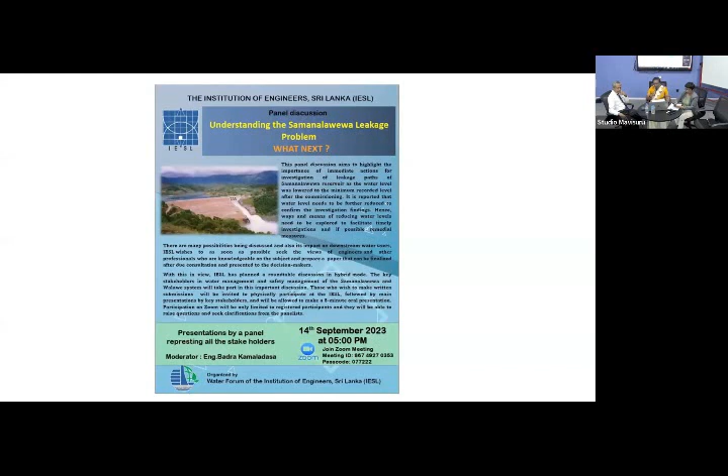With that small introduction, I will show you the agenda today. We, Water Forum and IESL, invited a few relevant stakeholders for this discussion. We call it a roundtable discussion, even though there's no roundtable here. Anyway, there's a small roundtable. Most of the resource persons are there in the audience.

The first speaker will be Dr. Kamal Laksiri. He will speak, as Kamaladasa mentioned, about the history of the leakage, and that is the area we have given him, we expected him to cover. And then Dr. Jagat Gunatilaka. I will introduce each and everyone separately.

Then we invited Ceylon Electricity Board, Mahaweli Authority, Irrigation Department, National Water Supply and Drainage Board, Disaster Management Center, and Sri Lanka Energy's mini hydro company, Mulgama Mini Hydro Power Project, and also Engineer Arupala and Dr. Tilakshmi Balapitiya, so we have to address the issues elaborated by Engineer Kamala Gunawardana.

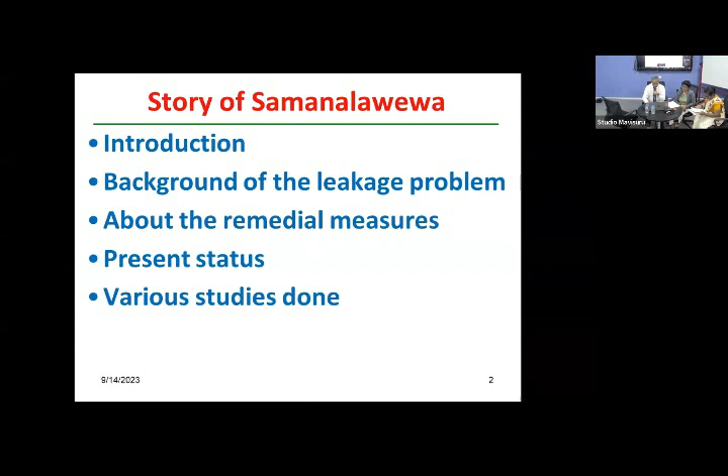This is the presentation set up today, about the Samanalawewa project. I think you all know it as one of the major power projects in the country. It's on the Walawe River, mainly for power generation, but we have a small irrigation component that feeds the Kaltota irrigation scheme.

This was made during Minister B.S. Ranaka's time. This project, like all the other projects in the country, was studied since the 1960s by the Russians, Australians, Americans, and also our local Irrigation Department. Many studies were done, but as usual, because of funding issues, we could not implement the project until the 80s. So in 1986, during President J.R. Jayewardene's government, we could secure funds from UK, US, and Japan.

The major component of funding came from Japan, and we could implement the project. The project executing agency was the Ceylon Electricity Board. We had international consultants from Japan, and Electrowatt from Switzerland, along with the local partner CECB and the foreign consultants. We also had a separate design engineer from UK, the leading company at that time, Alexander Gibb and Partners. The construction contract for the project was a joint venture by Hazama, Kumagai, and other firms, all from Japan.

So this is the Samanalawewa layout. The Russians actually gave the name Butterfly Lake, so the Russian name comes from looking at the reservoir shape, which resembles a butterfly. And we have the Walawe River.

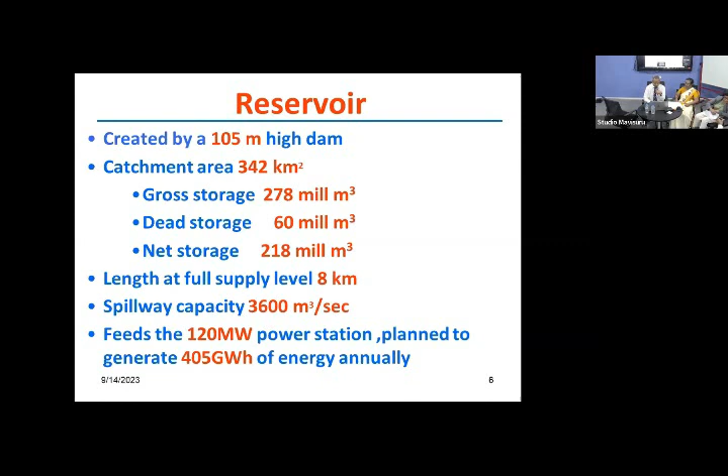Let me come to the geological aspects. I think we have geological experts here, Dr. Gunadasa, but I will briefly mention: the rocks belong to the Precambrian metamorphic rocks, very old rock types found on earth.

Especially if you look at this, the right bank geology was very complex, subjected to faulting - natural cracks in the ground - and folding, a bending kind of thing. This changes the characteristics of the ground. Especially at this site, we found surface caves. I will show you some photographs, and the permeability is very high even at the deeper levels. This is also a special feature.

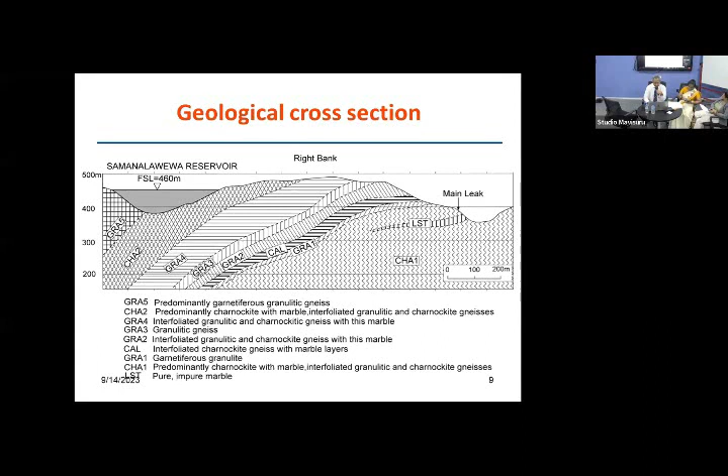But when you come to the dam foundation and left bank, the geology was totally different. I'll explain with the diagram. This is a cross section across the dam, across the river, along the dam axis.

When you come to the right bank, you can see the geology was very weak, and we had to drive 4 tunnels. You can see adit number 1, A at top, B, C, D - we had to drive 4 adits into the mountain, routed up and down. This shows the weak geological conditions in the right bank.

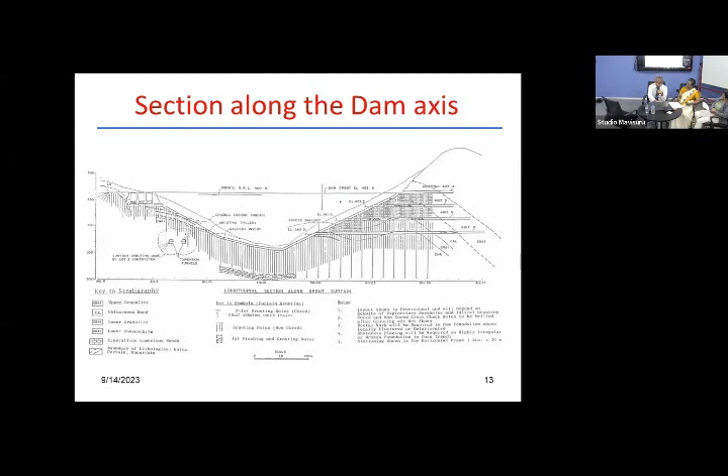So then you can see the difference between the right bank and the left bank and the foundation. The geology is very different. Then we discuss about the leakage problem. Then we started the dam foundation excavation, right abutment excavation.

We found the weathering, that is the weak rock, is spreading much more than we thought. This was found during the investigation. And also this abnormal groundwater level. Abnormal means the groundwater level is responding to the river, indicating that there are connections with the river.

So there were various opinions, Japanese, British, and the local. At that time, our giants like Singha, also KKYW, all were there in the decision-making process. Different arguments. Then everyone finally agreed, okay, let's go for a trial impound. The simple thing that we would do is fill it and see whether it leaks.

The Japanese were confident, they said no, it will not leak. The British were of the opposite opinion. Finally, we decided for a trial impounding. In June 1991, we started to fill the reservoir while the other works are going on. But unfortunately, we could not fill the reservoir just when it reached 16 meters water depth, the soil started to leak. It was obvious that it is going to leak. So this was the first evidence. Then we had to stop the impounding, the reservoir filling, and we planned for the remedial measures.

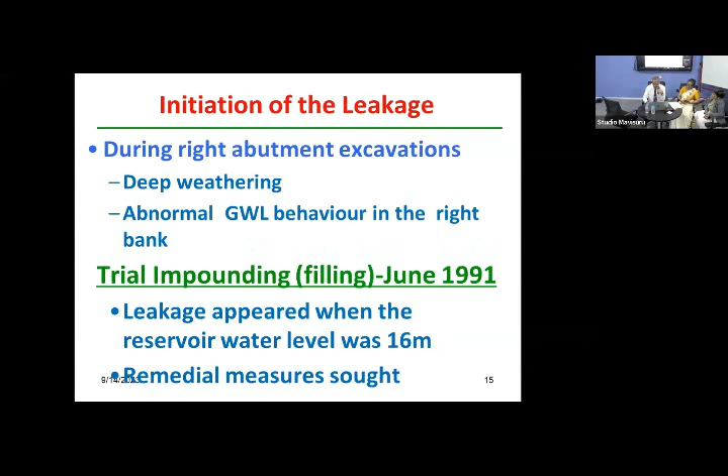Then the consultants, everyone discussed about the issue. Now it's very sure, it's going to leak. So how are we going to tackle it? Then came the first solution, the first remedial measure: to construct a grout curtain across the right bank and cut off the leakage path. I will explain this in the next diagram.

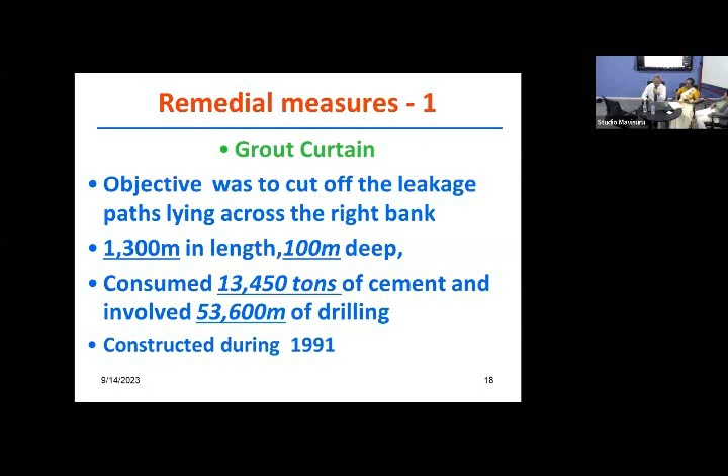So we constructed one of the largest grout curtains in this country, I think 1.3 kilometers in length. It's 100 meters deep, and it consumed 13,450 tons of cement, equivalent to the cement we use for this Rantembe Dam. It involved 54 kilometers of drilling to grout. It started during 1991.

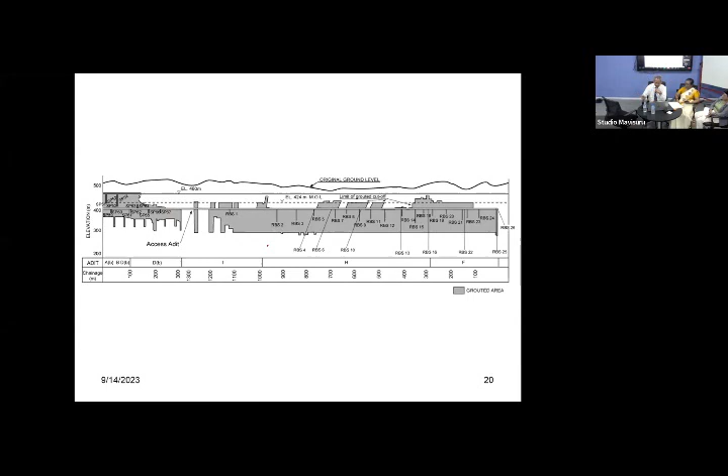But again, at that time the consultants decided, okay, 100 meters is sufficient, and that is how the depth of the grout curtain was decided. Then we did it, completed. And again, the plan view, if I show you, you can see this shape of the grout curtain.

We did it like this, but there were a few other faults, so to cut them and cover them also, we had to take a shape like this. And you can see these tiny numbers.

Actually, with the construction of the grout curtain, we installed piezometers, or the pressure gauges. We wanted to monitor the effectiveness of the curtain upstream and downstream. So we installed a number of them, you can see, SP1, S1, like that, DW, both upstream and downstream. Theoretically, if the curtain is effective, you should not get a pressure downstream, right? That's very clear, I think, to all of you.

And then we completed the grouting and spent 2 billion rupees on that. Same contract, and the Japanese funding agency OECF, that is now JICA - those days OECF - they funded and extended the loan, and we got the money and completed it.

And on 5th March 1992, Honorable Chandra Bandara, then Power and Energy Minister, came and started the official impounding of the reservoir. But unfortunately, the leakage continued to grow amidst the presence of the grout curtain.

So we did not care about the massive grout curtain we built inside the mountain. We observed as before, no change at all. And at the same time, the groundwater level in the mountain also started to rise with the reservoir.

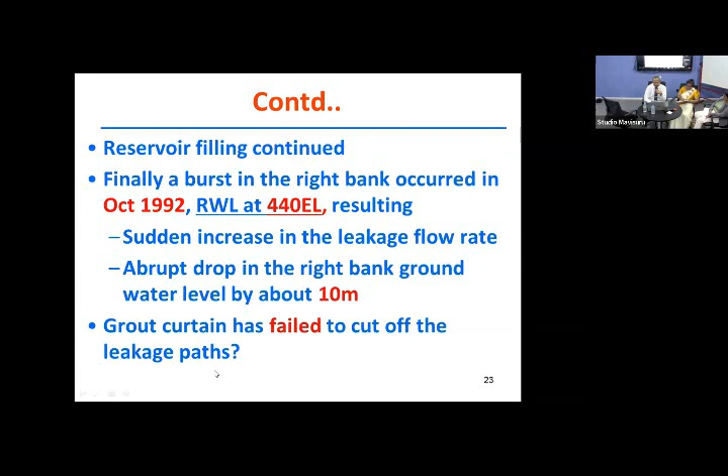Then with that, the leakage flow increased suddenly. I will show you some photographs. And with that, the pressure released in the right bank, so the pressure dropped by 10 meters. So that indicated the grout curtain failed against the leakage.

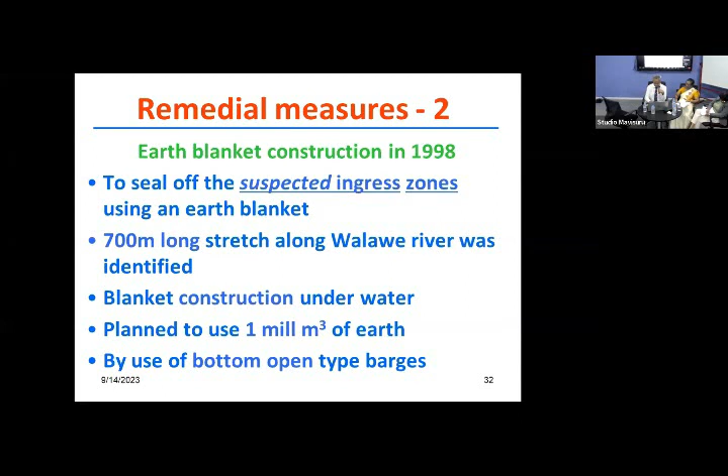I will explain further like this. Earlier we tried to cut these faults within the mountain itself. Now the study established that these 3 faults cross the riverbed within this stretch, so we suspected the water was entering from the riverbed, not through the slope. So let's seal this with the earth blanket. That was the idea of the wet blanketing.

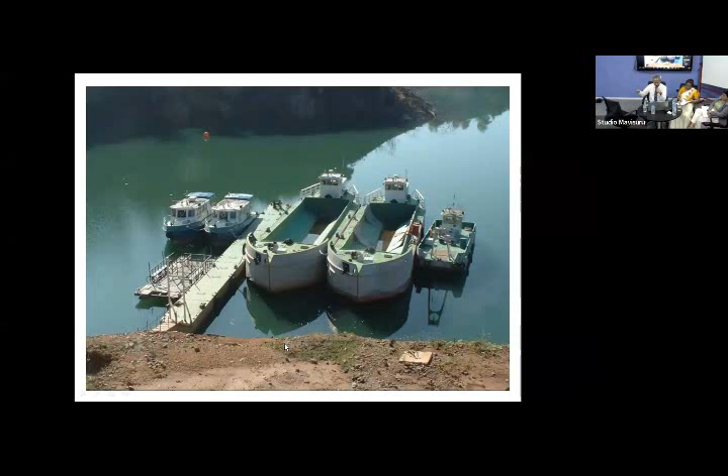So again, another diagram. These are the specially built barges, 2 bottom-open type barges, each with 125 cubic meter capacity. You can load earth into this, move to the location, and open the bottom so it goes down as a lump. We controlled the moisture content and did some piles, so as a lump it would go and hit the bottom and block the leakage ingress point.

That was the idea, but yes, we started and completed it. We dumped along the whole 700-meter area, but again there was no response at all. So we were wrong for the second time. Nothing happened - all 700 meters covered, no response from the leakage or the groundwater pressure. In the consultants, we all discussed that.

We thought, okay, let's dump in other areas on a trial basis, and we started to work downstream from the sealed area. I'll explain with the diagram.

So then accidentally we hit one location. In the map, for identification purposes, we numbered them in blocks. So in the area called Block X, once we put the dump there, immediately the leakage started to respond. Leakage reduction was very small, but the groundwater pressure reduced by 14 meters. It's an achievement of the wet blanketing.

So you can see it again here - go back. This is the ingress area. We tried here, nothing happened. Then we started to work downstream, coming like this up to the dam. So this block is somewhere here in this bend. When we dumped there, it started indicating that there was an ingress point. It got blocked with the dumping. That's the only achievement with the blanketing.

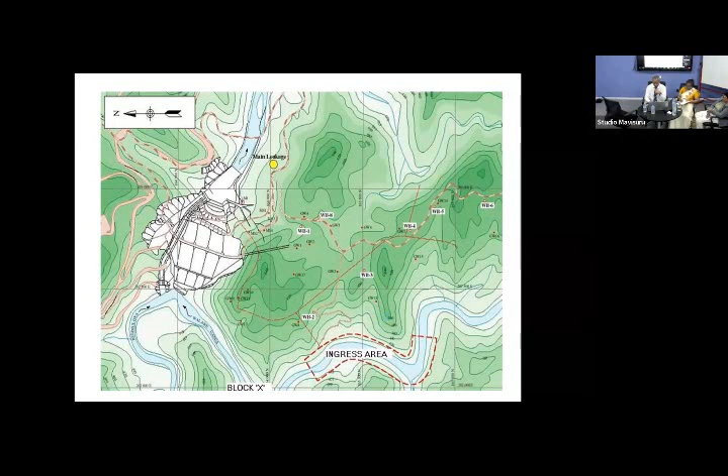Now again, if you look at the groundwater level and reservoir level variation, you can see a similar behavior again here. With the reservoir level dropped, the groundwater levels dropped and bounced back, as we observed in our earlier incident. But still, we could not understand why it was behaving like this.

And then after that, wet blanketing was suspended in 1999. Till today, the leakage has been continuing, and there's a difference between the reservoir level and groundwater level - they both move while maintaining a gap. Actually this is one achievement, because when you have high groundwater pressure inside the mountain, it leads to bursts or earth slips. So this way, safety was ensured to a certain extent.

But then in December 2006, suddenly one night, erosion occurred in the outlet, the leakage outlet. With that incident, the groundwater level dropped by another 10 meters. This happened without any control, indicating that it was due to flow erosion.

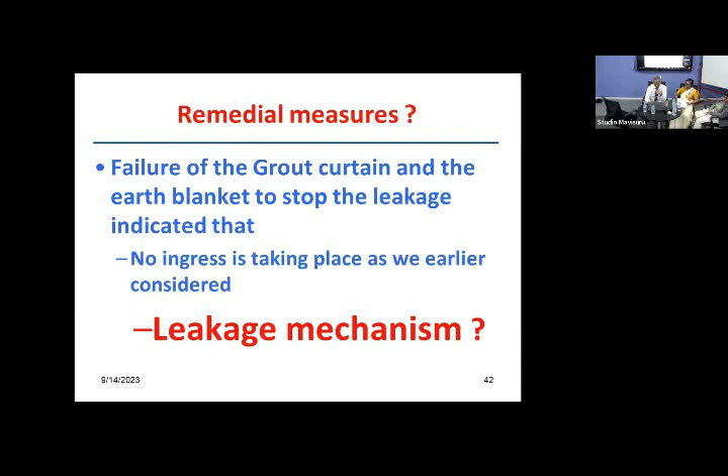Then, since that time to date, a number of studies were carried out: an isotope study by the Atomic Energy Authority of Sri Lanka, and also an analysis I did during my postgraduate studies as a postdoc, geophysical studies by Professor Andy Hughes from UK, sonar studies by Deep Sea, a local company, and sonar surveys again by Dr. Gunatilaka from Sabaragamuwa University. I think he's supposed to join us.

And then the recent findings by Dr. Jagath Gunatilaka from Peradeniya, so we listened to all this. Let me explain how I analyze this problem, but I will not cover the whole thing as it's limited.

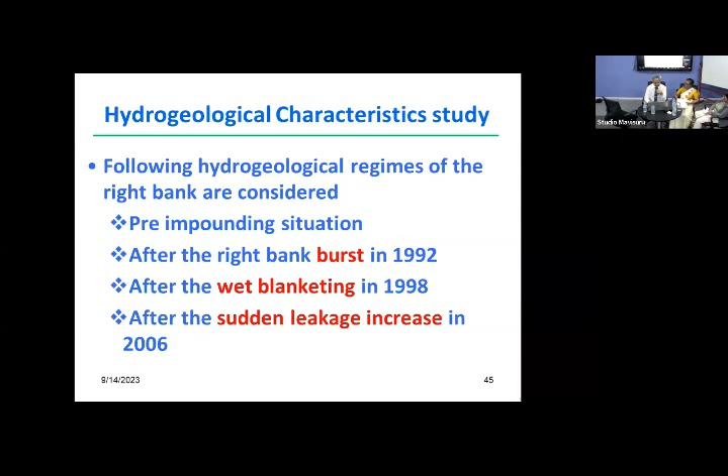So basically I conducted the groundwater behavior study, considering from the initial impounding to the date, using the long data record we have. I studied the groundwater level behavior of all these. We have a large number of boreholes from close to the dam up to a distance of 2 kilometers, and the interesting thing is all these boreholes, those near the dam and those far away from the dam, move at the same time with the reservoir, indicating that we have a huge underground reservoir in the mountain.

But still, this data, I think the consultants also could not use all this data. During my studies, when I went through all this data again, I found this very interesting behavior: a linear relationship between the groundwater level and the reservoir water level.

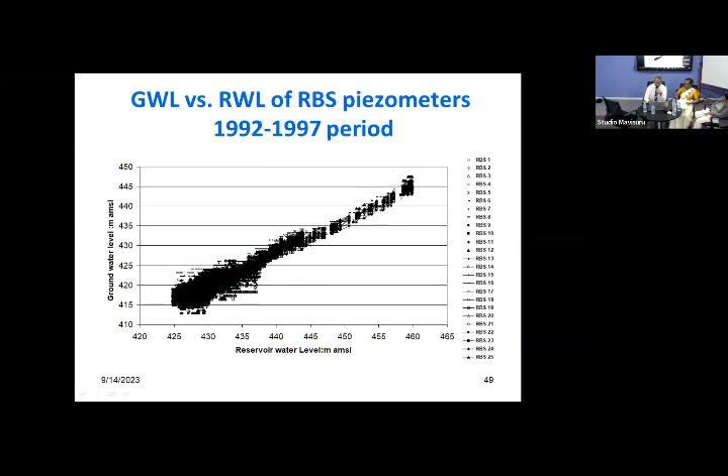And you can see here, all the boreholes behave in a similar pattern, but one particular borehole behaves differently. Similarly, we have a large number of boreholes, some inside the mountain and some close to the abutment. They all show a linear relationship, but with slightly changing gradient.

So then mathematically we can say like this. I calculated all the gradients of all these boreholes, and I will not go into detail. If I show you here, you can see those are from far away, and then this is the blue one, with the burst incident.

They were almost at the same level at the beginning, and then with the burst incident, it comes down to the second level with the wet blanketing - this red level. Then with the 2006 burst incident, it comes down to this yellow level.

But at the same time, you can see a few holes do not follow that pattern. They behave differently, but we didn't see that during any of our initial planning time. So they say something, they give a message, but we failed to catch that at the time, or we didn't see it.

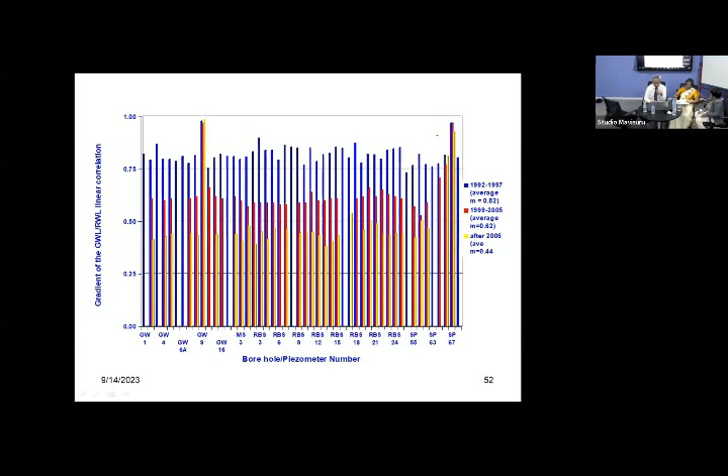So basically we call it a geological aquifer. It's a huge reservoir in the right bank, and it's like another reservoir.

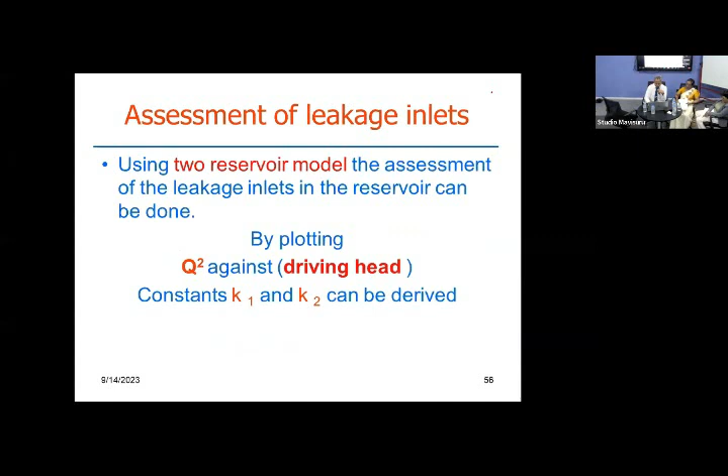And then mathematically, I tried to see where we can get this type of linear relationship between the groundwater level and the reservoir level. I will not go into details. Then, also using the same result, I made an assessment of the cross-sectional size.

If you are making a model or the prototype, what sizes do we need to maintain this much pressure and flow rate? So you can see the areas now - these are matching with what we see in the outlet, and they also reflect the various incidents.

Now, these are the inlet and outlet sizes we had, and with the wet blanketing, you can see the outlet did not change, but the inlet changed. I'm not saying these are the exact sizes, but in this scale it happened. And with the 2006 incident, the outlet increased, but the inlet didn't change.

But still, this data also indicates that it's following this model. So again, very interesting - with this two reservoir model, we can explain this type of behavior. You need this type of pattern where you can see the pressure drops suddenly and bounces back. So this we can...

And another interesting feature was from the initial impounding - you can see the reservoir and the groundwater behave with blue and yellow colors. You can see it going like this, but then at this point, in the elevation between 420 and 410, you can see this - they join the other boreholes.

So this also says something, but though we failed to understand it at that time. This is also an indication that the major leakage inlet is located between 420 and 410.

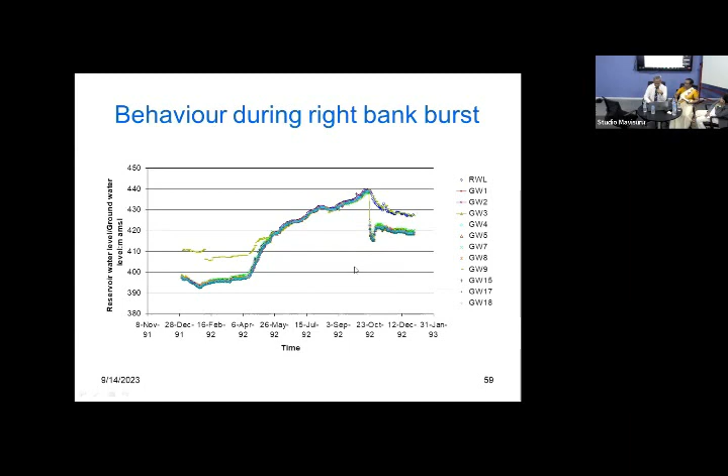I'm sorry, there are a number of other slides to explain this, but due to time constraints I won't go into detail. If you look at those boreholes, you can see they all behave differently and are located close to the dam in one stretch. This indicates there is a possibility of a leakage channel lying close to this, which is why the gradients of these holes change differently.

If you look at the two reservoir model and the connecting channel, at the points along the channel, the head from the first reservoir to the other one drops. The same possible phenomenon is indicated, suggesting there's a major leakage channel lying at this point.

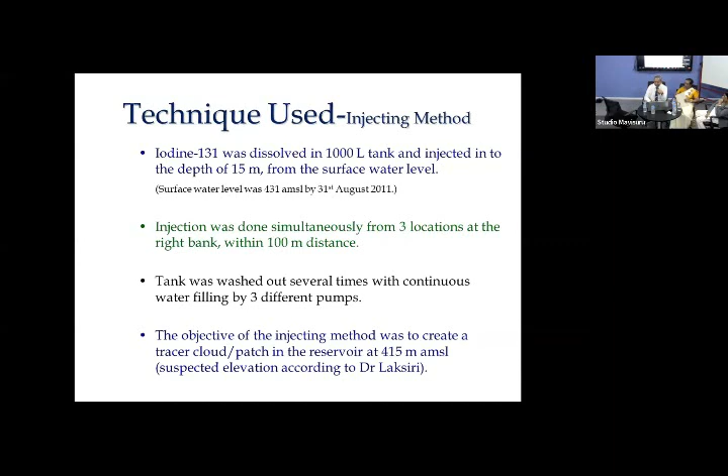What we did was use injected iodine-131, because a dye test won't work for a huge reservoir - you would need gallons of dye. But with isotopes, we only used 10 milliliters for the injection.

We could find isotopes coming out from the leakage. So this is a kind of first-hand evidence we got from this isotope study that there's a major ingress lying in this area.

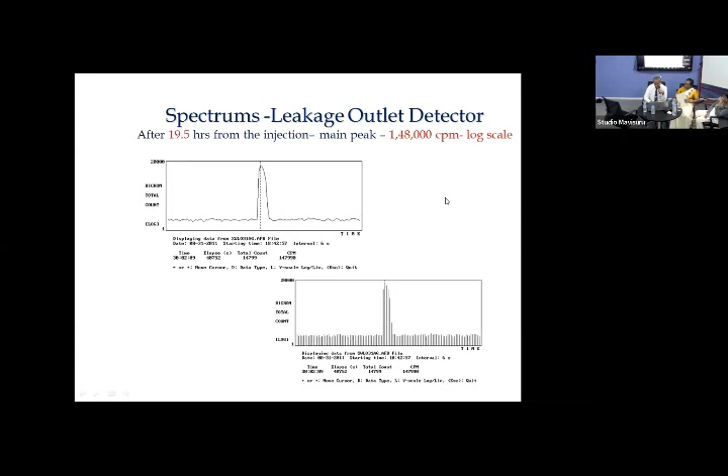The conclusion we can make is that it's not widespread seepage. At the very beginning there was an argument that the whole reservoir bed is leaking and can never be sealed. But if that were so, the groundwater and leakage water relationship would be an exponential curve mathematically - we can show that. Why do you get a linear relationship instead? That's because of unique inlets. This is a very important conclusion: this is not widespread seepage, but leakage through unique inlets.

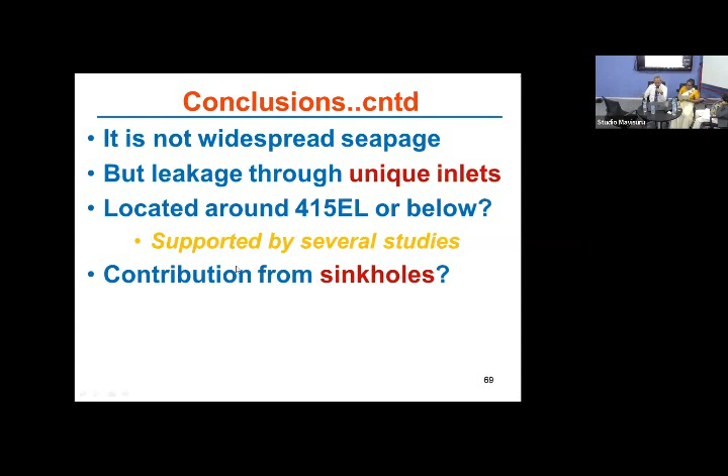Then lately we found sinkholes - I think you saw it in the media. Before that, we found this type of sinkhole in the mountain back in 2004, as I remember. But again, we lowered the reservoir below these sinkholes and the leakage reduction was very small. So they are contributing to the leakage, but it's very small, less than 10%.

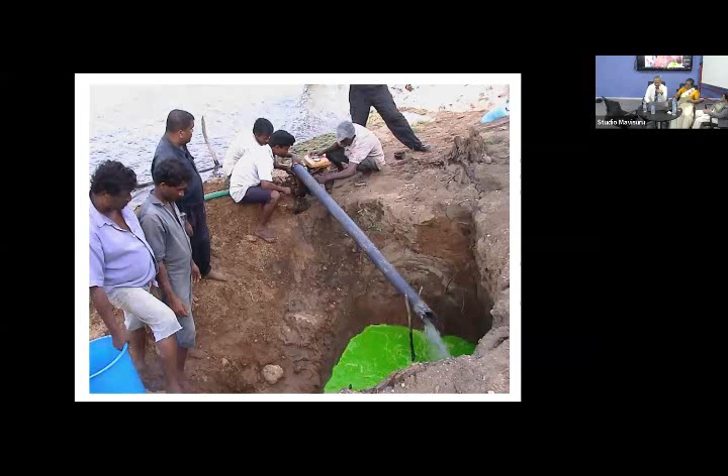You find this, but this can be seen over time. Still, we have major ingress contributing 75% of the flow at one level. So these are the various tests we did at that time - some more photos, these are the studies I mentioned earlier.

Finally, my conclusion is that this can be sealed - give us an opportunity. So what are we asking? After a long time, the reservoir reached 424. You know the power crisis in the country - we can't drain the reservoir. It's very difficult because Samanalawewa is one of the important power plants feeding the down south.

But still, after impounding, after 20-25 years, we got disappointed. We saw the drought came to its lowest level, but our request is to lower it another 10 meters. The storage is about 20 MCM, but that can be stored in Udawalawe for irrigation. And with that, we can seal this.

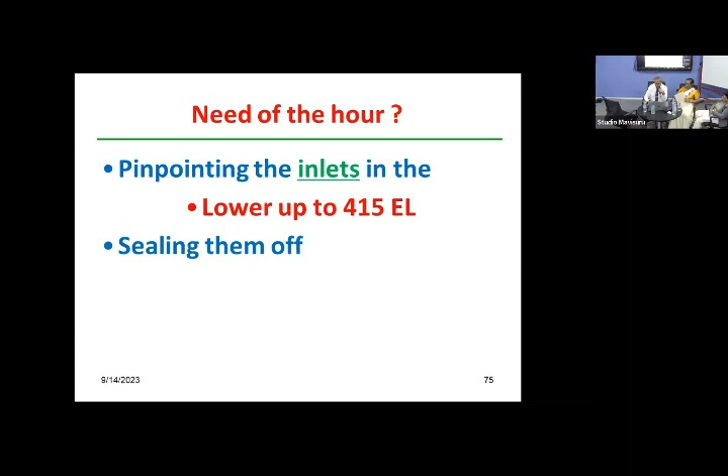Thank you very much, Dr. Laksari. It reminded me of a doctor going down the hospital ward, a consultant, with the staff briefing the history. But here, the consultant and the junior doctor, everything is within you. Actually, this is a sick dam, I must say, in terms of the dam engineers' vocabulary. Out of the 120 large dams in Sri Lanka, this is the most sick dam. Unfortunately, when the dam gets old, only this type of sickness arises, but here, at the infant stage itself, unfortunately, we came across this. That is why we are trying our best to fix this as much as possible. Otherwise, in some other countries, what they propose is decommissioning the dam. So this type of history is needed definitely, to record and to find the remedial measures.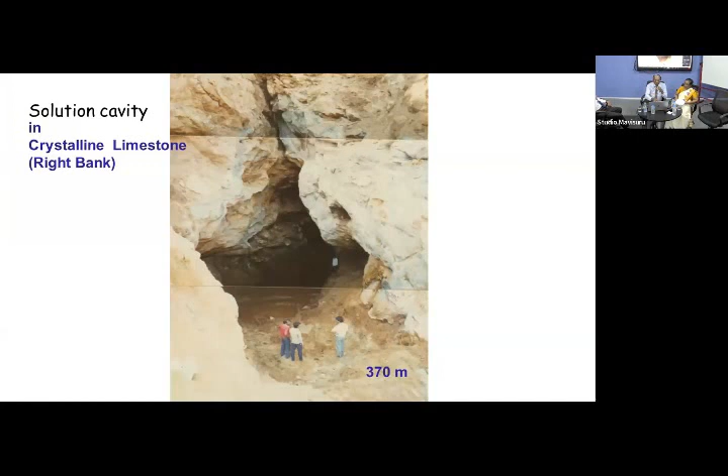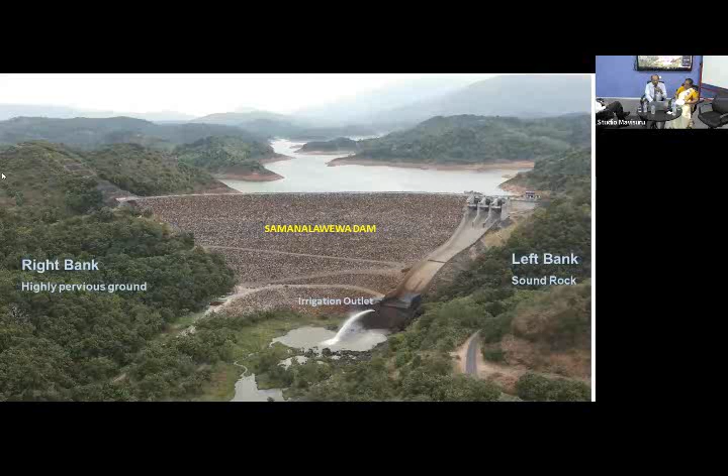Okay, so this is the right bank, which is highly pervious ground. This is the main leakage, up to about 2 cubic meters per second, depending on the reservoir level. When the reservoir is at the higher level, this becomes 2.34 cubic meters per second, whereas at present it is about 1.8 cubic meters per second.

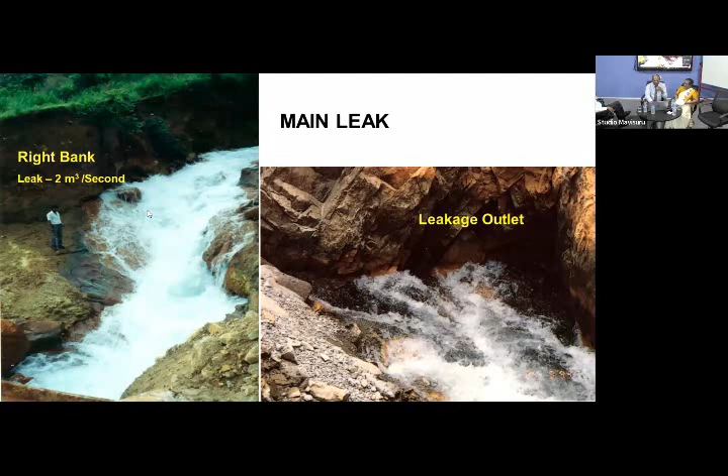So, the right bank viewed from downstream - you can see the location of the main leak here, about 350 meters downstream of the foot of the dam. The entire right bank is highly pervious ground, just like a honeycomb structure. That's how even the consultants have identified it.

So this is the wet blanketing operation. Laksari has already explained this, which is block X. During wet blanketing, results came only from this block X, covering the block X area.

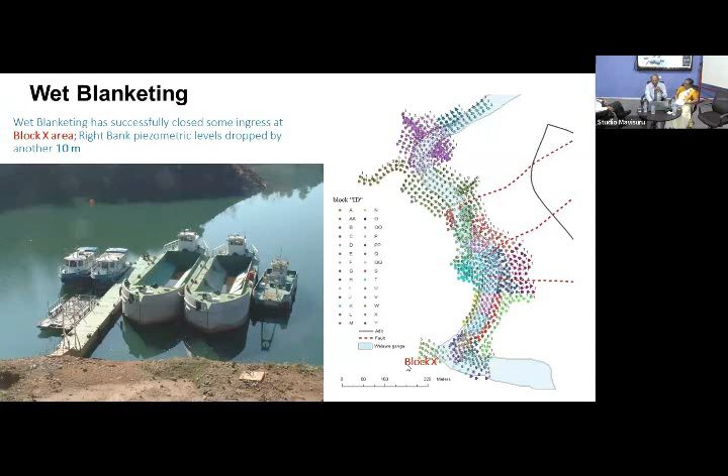So this is the recent drone image taken. Six sinkholes have been exposed while the water level was reduced recently. So the so-called block X is also here, and there is one access adit constructed to build this main grouting tunnel, there.

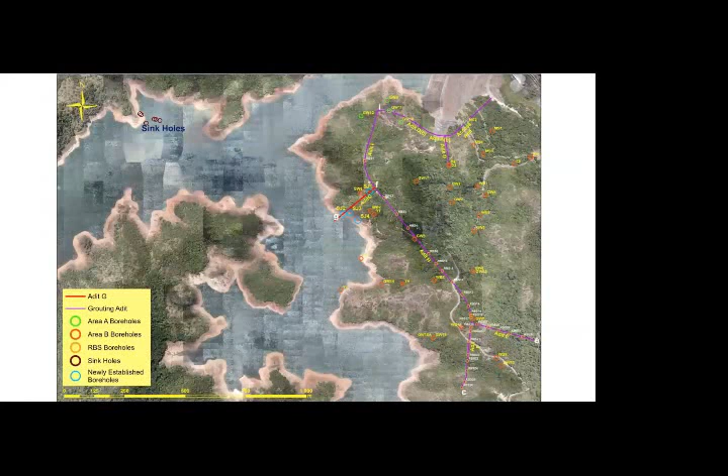Right, okay, the main leak is here. So I have enlarged the very critical area where the sinkholes appeared, on the left bank of Walawe upstream.

And this is called the access adit, adit G. Later on I'll explain, as this is the main cause of the leak, the main ingress of the leakage. Whereas these are the boreholes that have been drilled on the right bank, almost all of them—there are about 45 boreholes which have been drilled since then.

So all these showed the same water level as the river level before impounding. So just after impounding until the major water burst happened in 1992.

So mainly this entire right bank is divided into two areas, area A and area B. Area B boreholes showed the same groundwater level as the river level before impounding, and after impounding as the reservoir level, until the main water burst—exactly the same, without any difference. But area A boreholes, marked in this blue color, showed no response to the reservoir level or river level before impounding.

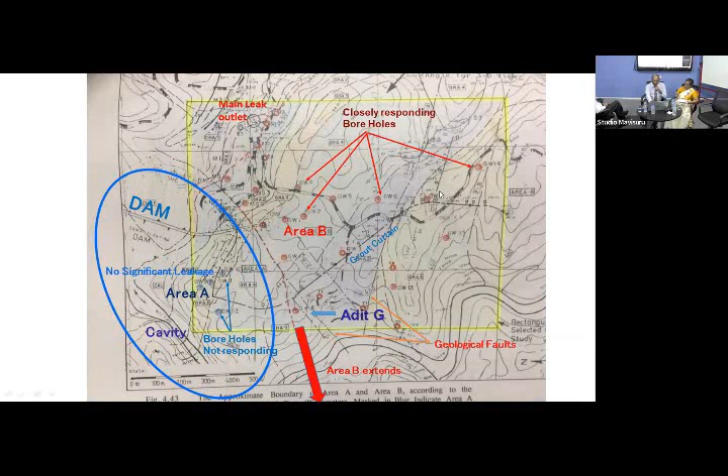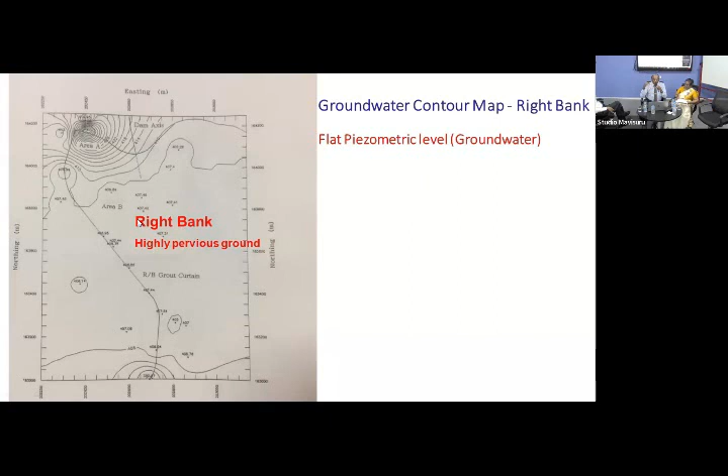So that's why—so this is the dam, and this is the grouting gallery, and you can see this is a groundwater contour map of flat piezometric level. So everywhere, almost all the boreholes showed the same groundwater level. That's why it's called a flat groundwater table on the right bank, area B.

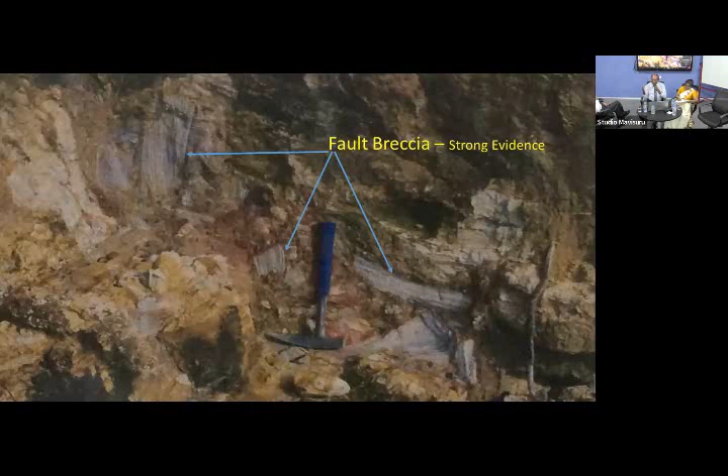And the water burst during 1992, as it was well explained, the water level dropped by 20-plus meters, and later stabilized with a 10-meter difference from the river level. Except for a few boreholes in area A, like GW9, which showed the same reservoir level, unlike all other boreholes in area B, which showed the same response to the reservoir level, but with a 10-meter difference.

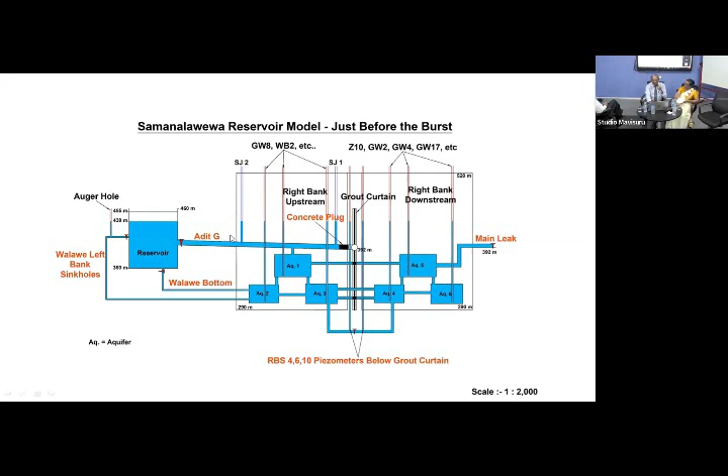But these boreholes had been drilled just 2 months before. So now I'll show you just after the burst.

Just after the burst, there was a 25-meter difference in the groundwater levels on all the boreholes compared with the reservoir level, except for the recent drill holes SJ1 and SJ2.

They showed the same level as the reservoir level, which clearly indicates that there's a free passage through adit G into the right bank and then into the aquifers on the right bank.

So the justification for this is that we need to remedy the leak for safety issues. This has been done mainly by analyzing the behavior of right bank piezometric levels, which are actually groundwater levels, through the monitoring holes.

This shows a representative borehole, that is GW2. GW2 represents all the area B boreholes out of these 45 boreholes and so on. The behavior was almost the same.

So initially, up to the major water burst, the gradient was 1, meaning exactly the same as reservoir level. On the day of the burst, it dropped by 20 meters initially, and later recovered.

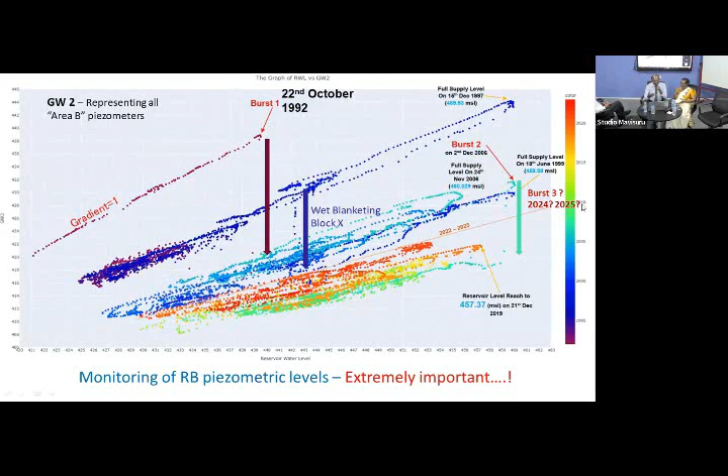In 2022-23, this has been like this. In 2019, reservoir level was raised up to 457.37 with the very high rainfall and so on. This clearly shows that we have to expect some other burst, a third burst, maybe in 2024, 2025, or 2026. So I want to make the CEB aware of it and get the remedial measures done.

This also shows the GW2 borehole, how it changed in 2008 after the second burst, behaving like this. Looking at 2012, 2016, 2019, 2022, when it goes, levels rise in 2025 because the trend is there. So we can expect another burst in 2024 or 2025.

There are, in between, some boreholes which do not have much response, that is area A boreholes, GW6, and some boreholes in the grouting adit, like RBS 4, 6, 10, etc. Their values are read by the analog meter, so the accuracy is much less. That's why the behavior was not so clear.

That's why we propose, during our recent study, that accuracy and frequency should be increased, so we have used digital modules. Digital modules have been installed so that we can take readings every 30 minutes, or even during critical situations, within every 5 or 10 minutes.

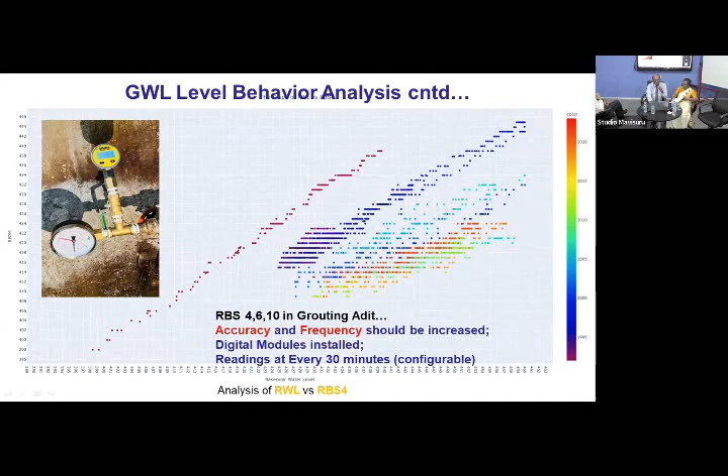Also for the boreholes, as a sample we have selected 5 boreholes which are very critical, and we have installed similar digital modules so that we can get information very frequently and very accurately. This is, I think, the first time this has been done in Samanalawewa.

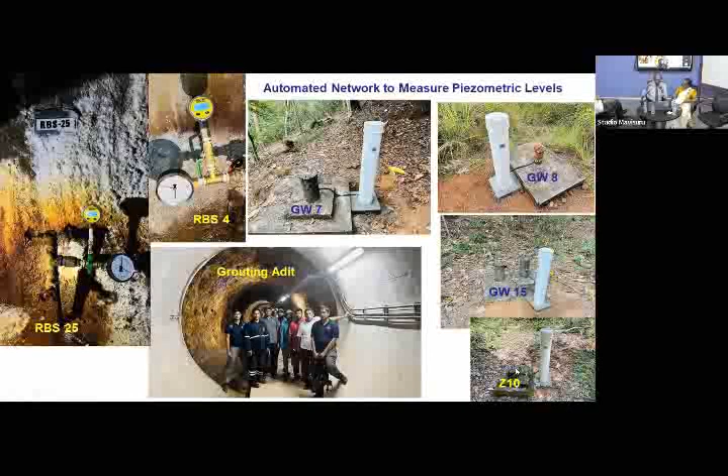This shows these digital sensors, digital modules, so we can get readings frequently. These are the digital modules installed for right bank boreholes GW7, GW8, GW15, and Z10, which is very close to the main leak. GW8 and GW18 are about 2 kilometers away from Z10, but both are showing the same groundwater behavior and elevation levels.

Only this part is plugged with 10-meter concrete at the end. The entire section of this adit is exposed to the reservoir water, and these open joints, fractures, and holes are quite open, so water can very easily migrate into the right bank.

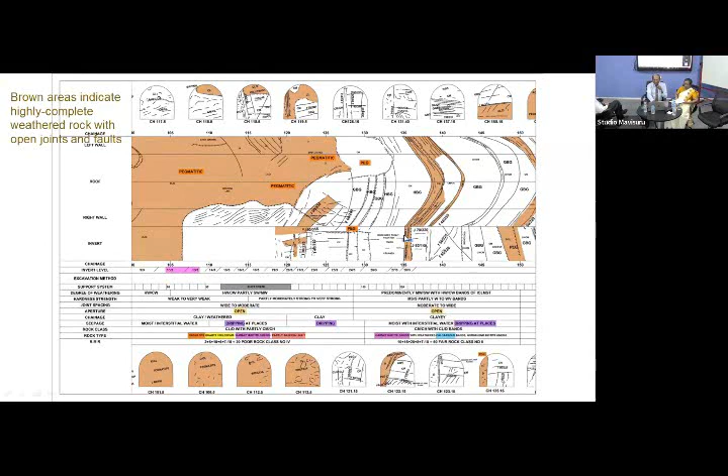These are some detailed views of the same adit. You can see the occurrence of some pegmatites, which are very good evidence for the occurrence of faults, and some cavitated crystalline limestone bands, etc.

We were very sure, I would say 100% confirmed, about the occurrence of this leak through this adit G, the main leak. We expect more than 75% of the main leak is through this adit G, so it is almost very close to exposed. During that time, and even today, the adit G portal is only 12 meters below the reservoir level.

We used divers and got some direct observations. They did video and still photographs so that we could see that adit G is completely open, it has not been closed. Whenever the divers touched the walls of the adit, it caused turbulence with dust, and all that dust went inside the tunnel. Nothing came out from the tunnel side, so there is a flow towards the tunnel.

We also did a dye test. We inserted dye into the adit, and we could not see anything come out from the adit G portal, because everything goes into the adit. But as Dr. Laksiri mentioned, this dye would have been dissolved in the large reservoir and large aquifers in the right bank, so we could not detect it from the main leakage or the other piezometers that we monitored closely.

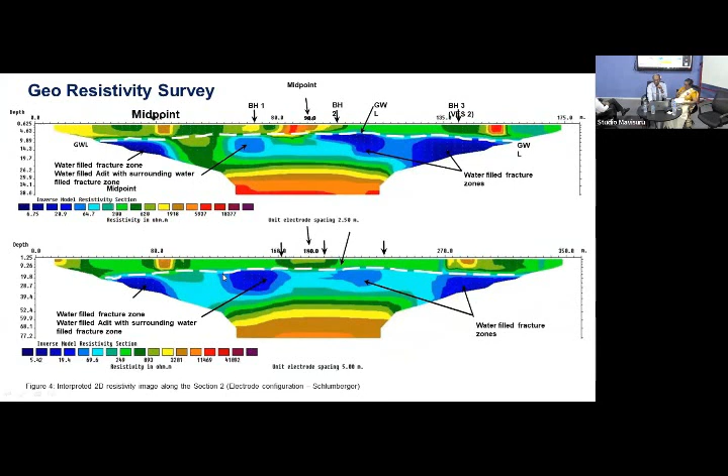This is the right bank, adit G, with surrounding water. Groundwater table also could be very well predicted there. The same way we have done resistivity survey in sinkhole areas also.

So this is the way the same sinkholes have been used to monitor how much water is going inside the sinkhole. Usually the water level should be same as the reservoir level, but when water is sent to these sinkholes, it quickly diminishes, infiltrating into the ground. So you can see here, once sandbags are placed, water quickly drops in the same sinkhole.

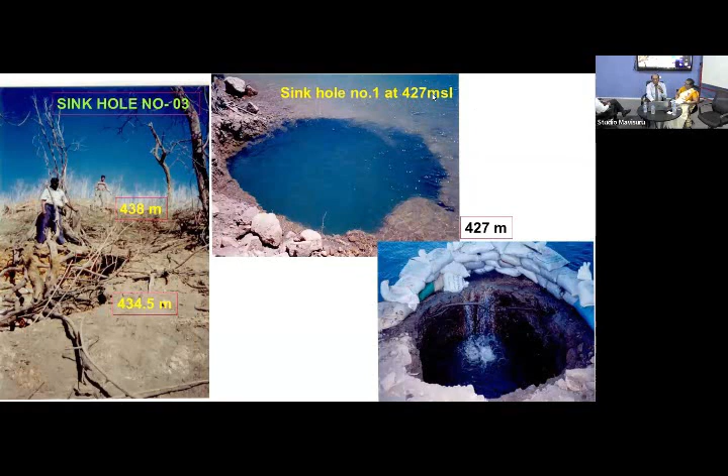Sinkholes are distributed in about 10-meter elevations along the reservoir periphery, from 438 meters until 427 meters. The lowermost exposed so far is 427 meters, but there must be several more even below that.

So these are the sinkholes. When this is exposed, we try to measure the rate of leakage into the sinkhole. At this elevation, it was about 1/600 of the main leakage. So there should be 600 of such sinkholes to provide sufficient water to the present leakage. But the real infiltration would be much higher when the reservoir level is higher.

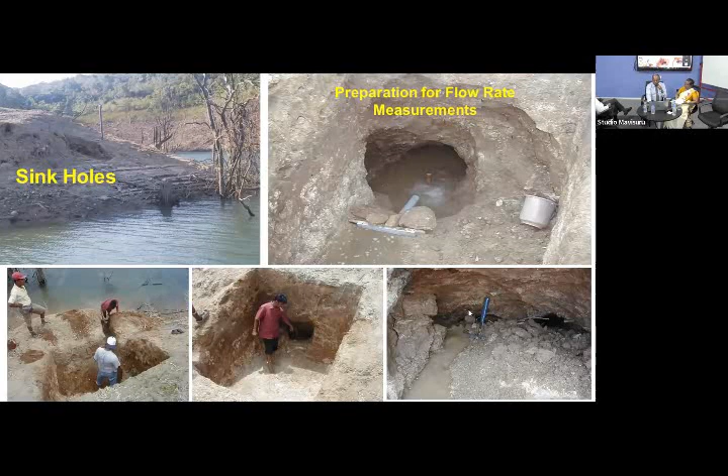So this is the way we did some studies, and we pumped water into some sinkholes mixed with dye, but it was not detected from the leak or downstream. This is the latest sinkhole that has been exposed, by 13th August, at 427 meter level.

Actually, recently, when CB was trying to estimate the seepage rate into these sinkholes, fortunately or unfortunately, these sinkholes have collapsed and naturally sealed. So now there is no seepage from these sinkholes at this moment. But interestingly, there is no difference in the right bank reservoir levels or leakage rate, it's both the same. That's why I propose the total seepage from these sinkholes must be much less than 10%, I would say less than even 5% or 2%.

Yeah. Same pipe. Just below the reservoir and going connected to the right bank. Yes. They have completely neglected.

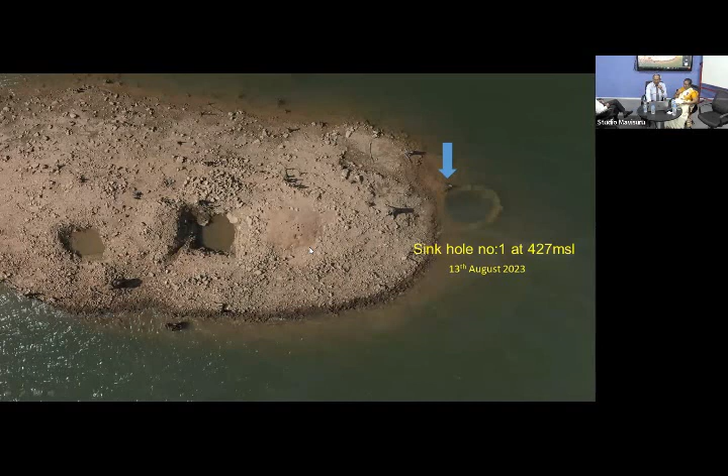Okay, so this is the area where the sinkholes are distributed. The uppermost sinkhole is somewhere here, and then these sinkholes are 1, 2, 3, 4 like that, and the one I showed you is here, somewhere here. Recently, CB tried to open up more sinkholes just to understand where they go, but as mentioned, fortunately or unfortunately, everything collapsed, and now there is no more seepage from these sinkholes.

So we did some resistivity survey along a line along the sinkholes as well, sinkholes 3, 4, 5, 6 like that. Geological mapping also confirmed this. This is only a part of the map, just extracted from the geological map that our geology undergraduates have done in the last month. Of course, that is not yet finalized.

That's why. So the sinkholes are here, and the Charnokitic gneiss and calcareous rock band is extending over there under the reservoir bed, and it also goes very close to this adit G area and into the right bank. So this would bring some of the water from these sinkholes along this rock band into the right bank, other than the adit G, which should be carrying more than 75% of the seepage ingress.

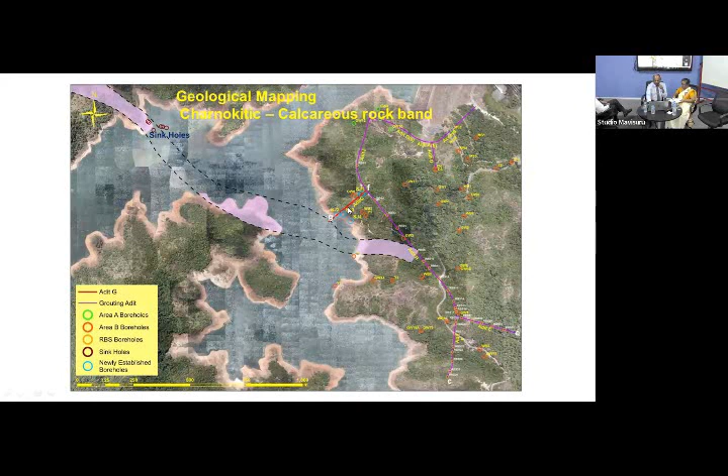So some drilling investigations also have been carried out in this sinkhole area. So, remedial measures proposed for reducing the right bank leakages.

We propose sealing of the adit G, which is an abandoned adit. It is estimated that more than 75%, it can go up to 90 or 95% even, of the leak can be reduced. If we reduce 75% of the leak, it is estimated that 200 million rupees worth of electricity can be generated within a month.

So per year, more than 2 billion rupees worth of electricity has been estimated by the CB engineers, and it has been confirmed by some experts, Dr. Tilak Siyambalapitiya and so on. He will explain it, right?

So we propose lowering of the reservoir below 415 meter elevation and carry out concrete lining for the adit G. That is the most permanent and long-lasting remedial measure. Or otherwise, lowering of the reservoir below 415 level until this adit G is exposed, and that can be filled and compacted with suitable clay or clay soil completely. The adit G can be completely sealed.

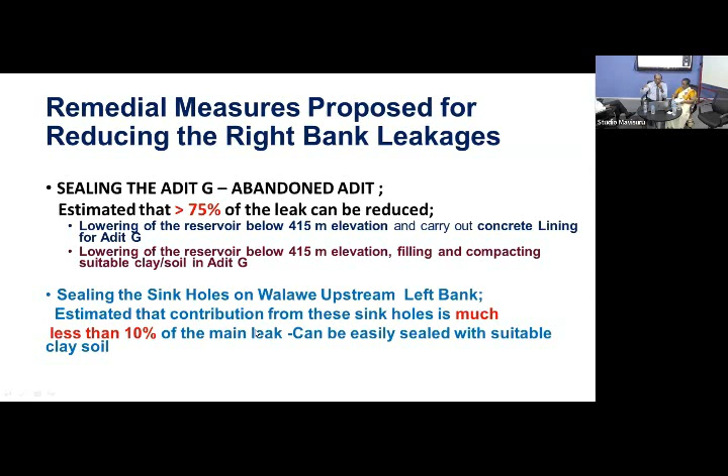So this is the proposal of sealing of the adit G. We have only very little time, maybe within a month, it has to be completed because Samanalawewa reservoir cannot be emptied for more than that. So we propose this first, these two walls, left and right walls, can be lined with simple lining because this need not be very smooth lining and all this. We just have to somehow seal it.

Later after that, this roof or crown area can be sealed, or concrete lining can be done. A minimum of 30 centimeter thick concrete would be sufficient for sealing it. It is 4.5 meter wide and 4.6 meter wide, and 4.6 meter height tunnel. The total concrete volume necessary for lining, in case of 30 centimeter lining, is 1,260 cubic meters.

If it is 20 centimeter lining, it is much less. In that case, 44 million rupees worth of concrete would be needed, just for the cost of concrete. That is estimated at site, just at the portal of the adit. Total cost of concrete volume is 44 million.

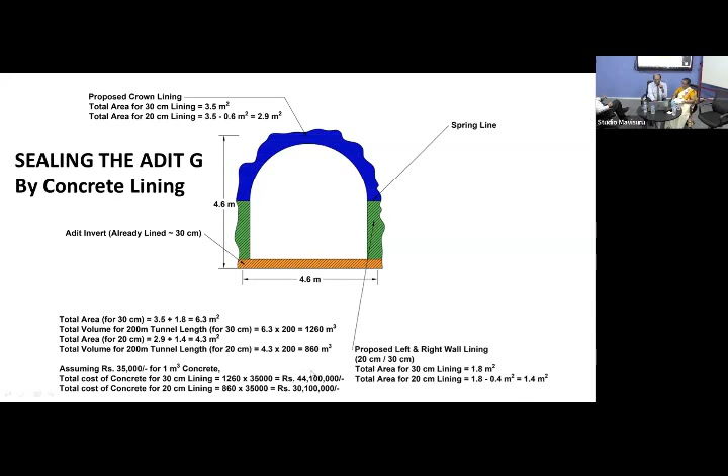So that can simply be pumped into the tunnel by pipes, because the adit is going inclined into the right bank, so within the pump car itself, that can be done.

So this is the second option, filling of clay, completely clay filling. It is roughly, after compacting, about 5,000 cubic meters. So it is 3,880 cubic meters after compaction, so the loose volume would be 5,000 cubic meters.

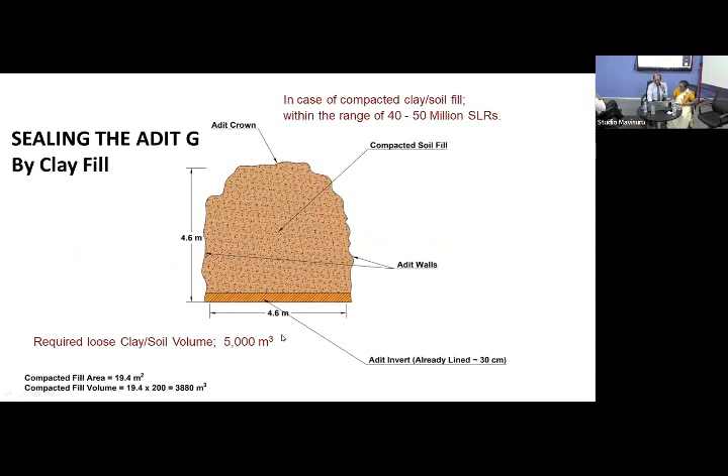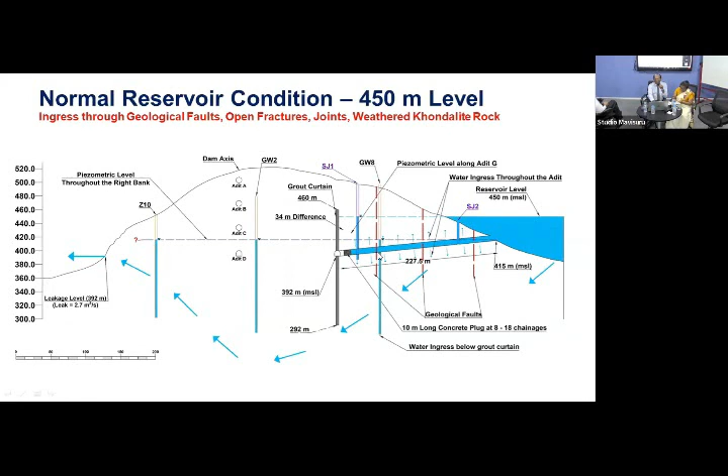So these are the three main faults identified along the adit G. They easily facilitate water migrating into the adit, into the right bank. When the water level dropped last month, or even today, only 12 meters of water level should be dropped to expose this adit G portal.

If it is exposed, whatever remedial measures selected can be applied. Still, water is going, infiltrating into the right bank, but we'll see what will happen when the water level is dropped by another 12 meters. Then the adit G will be exposed, and all the water in the adit G will go into the right bank aquifers, so it will get dried within a few hours to a few days' time, I hope within a few hours.

The water level also will be, interestingly, the adit G bottom level is here, and the main leakage outlet is also at the same level, 392. It's interesting, actually 392 is the bottom of this adit G level as well as the leakage outlet level. If the water goes below that, there will not be any leakage.

Except for the small amount of

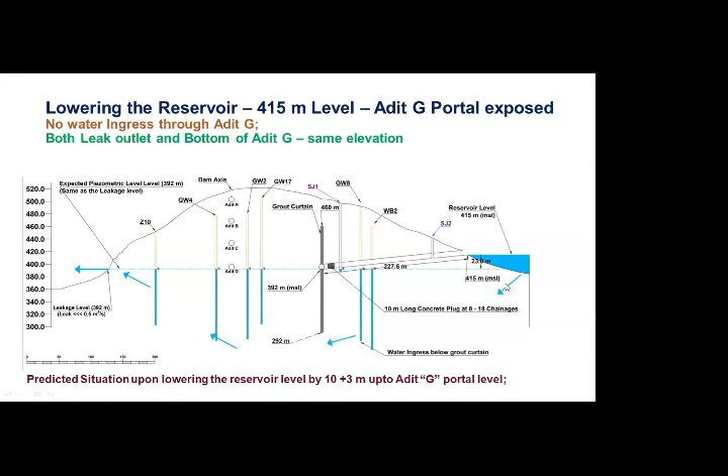Okay, so we'll continue. This is the predicted situation upon lowering the reservoir level by another 10 plus 3 meters, up to adit G portal level. So we can expect all the water in adit G to go into the right bank and it should be empty, regardless of whether there may be some leak or seepage from the bottom of the valley and the sinkholes, which will be much less than 10% of the main leak. Yes, that's all about what I wanted to explain.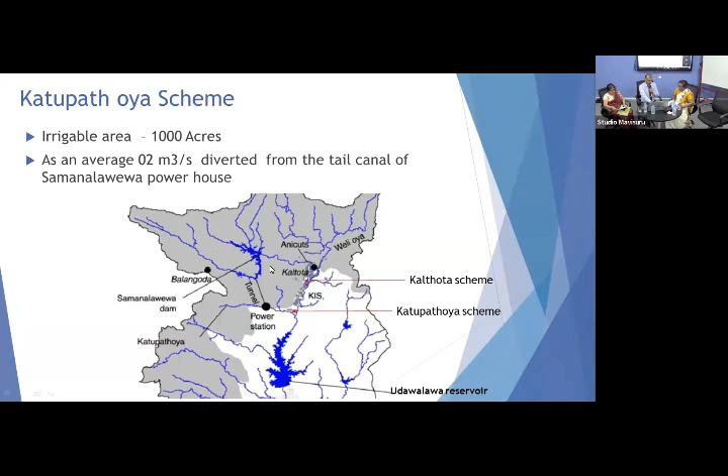This is the water requirement of Kalthota area from Samanalawewa. Now most of it is obtained by the leak, and a few months ago we got another 1 cubic meter per second from the irrigation outlet from Samanalawewa.

This is the average rainfall received. If average rainfall is received, it's considered a normal rainfall year. This is the requirement, October 0.5, and so on. This is the full requirement throughout the year, with maximum requirement about 3 cubic meters per second in the month of June. Wet weather means it is an extraordinary wet year, and this much water is required throughout the year, with maximum again at 3 in June.

There is also a maximum of 3 at the month of June. And if it's extreme dry weather, this is the requirement, also with maximum water requirement about 3 cubic meters per second.

For Kalthota scheme, actually for domestic purposes, 1 cubic meter per second for 10 days in the month of March is required for the use of the person in both canals. Same as in the month of September, the same quantity of water is required for 20 days. Actually, this water is used for the 3rd season.

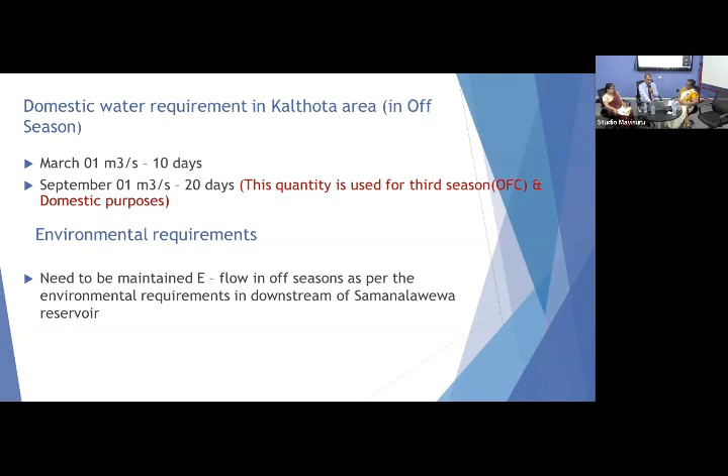The other requirement is the environmental flow required from Samanalawewa to downstream of Walawe. This is the total water quantity required for the year. As I earlier explained, if it is an average rainfall year, 51.28 MCM is required for the total year.

And if it is a wet weather year, it is lowered to 32.53 MCM from the Samanalawewa reservoir. If it is dry weather, it is 74.04, as we calculated. We calculated all these things with our past data and experience.

These are the reasons to use this much water. First, in two areas, Welipothayaya and Demodara area, all these paddy fields are sandy soil paddy fields. Therefore, our water consumption is more than the normal quantity. That is the first reason.

The second reason is that these paddy fields are located along the Walawe River, as a short strip between the river and the main canal. This length is high, 11.4 kilometers. Due to the geology, it is situated as a strip, so we can't reuse water. There are only 4 or 5 land plots along the canal, and the rainwater just drops into the river, so we can't reuse that water. Those are the main 2 reasons for using this amount of water during the cultivation period.

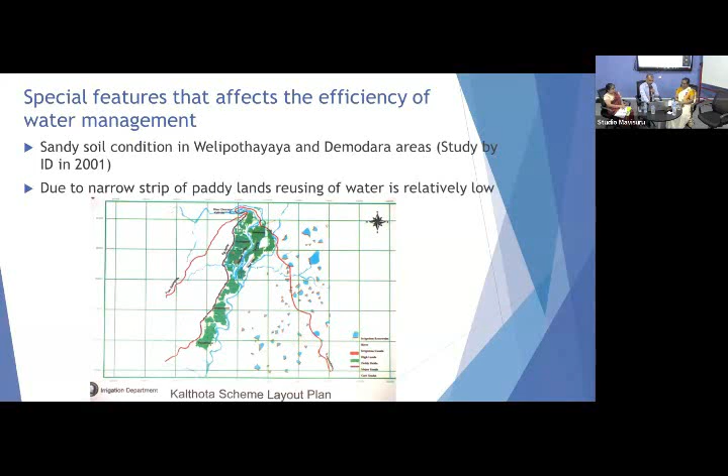We have some proposals to use this water efficiently. If we can improve the water canal system by lining or other means, we can deliver more efficiently and save some water.

The second thing is we currently have difficulty with laborers. We don't have enough laborers to operate gates, control water issues, and do proper water management. If we can increase our labor force, we can do better management with the available water.

Our third proposal is to install more gauges and controlling and monitoring devices to control this water. By the way, since the water drops into the river and the river level is lower than the paddy field level, we can't reuse that water. If there is a possibility using solar or other pumping means, we can try that method in future.

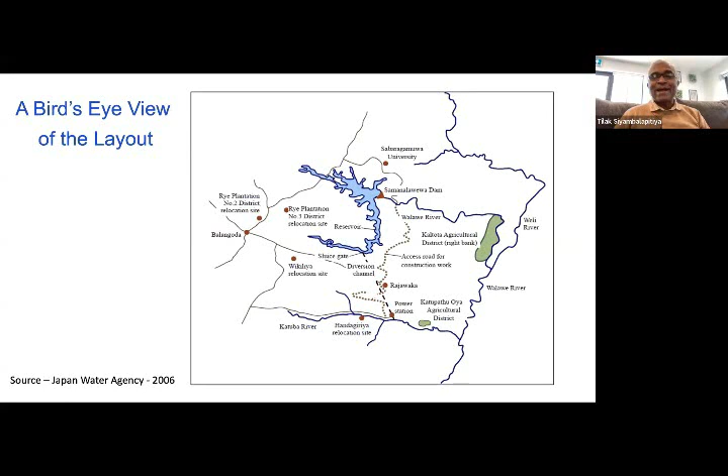Thank you very much. Good evening to you. I will be very brief since you are struggling to manage time. So the topic assigned to me is economic benefits of the proposed remedial measures. So I will move on. You have seen this diagram many times, I will skip this, as all of you are now familiar after several hours of discussion on the subject.

But I would like you to take a look at this diagram. This is a water flow schematic of the area, simplified to meet the requirements of the economic analysis. As you see at the top, Walaweganga and Belihulloya join up at Samanalawewa Reservoir, and we have the dam. From the intake, water flows to Samanalawewa power plant.

And there is a low-level outlet, which has been discussed quite a lot, which was expected to meet the irrigation requirements of the Kalthota irrigation area and elsewhere. And shown in red is the water leak.

And there are two mini hydros, as we have now learned. The Mulgama mini hydro was represented by the gentleman who spoke before me, as well as there is another mini hydro by the name of Samanalawewa mini hydro. What you see as data alongside all these assets is, for example, Samanalawewa mini hydro was commissioned in 2016. It has a capacity of 1.2 megawatt, and it produced 6.1 gigawatt hours per year based on the last 3 years of published data by the CEB.

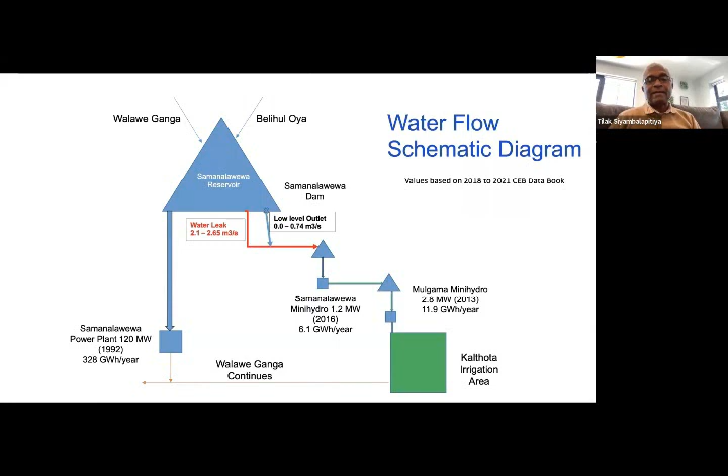So, of course, finally, the outfall of the Samanalawewa power plant, as well as any incremental flow, joins the Walaweganga, and the Walaweganga continues. So that's the water flow schematic. Of course, of interest to us is the water leak, which is shown in red, and the quantities that have been measured are shown underneath inside each box. So I will move on.

So once the civil engineers, geologists, and safety specialists discuss and debate, as well as irrigation engineers recommend remedial measures required from a safety and stability points of view, there is, of course, a professional way to assess whether the proposed remedial measures make economic sense. So it's not just some numbers, but there is a method of doing that.

So the interest to us here is on economic benefits to Sri Lanka, not necessarily to any party or an institution, and not even to CEB, because finally it is energy that is served to the economy of Sri Lanka. Of course, we can separately find out the benefits and costs to CEB and the benefits and costs to other users of the water. So let me straight away move on to my analysis and the results.

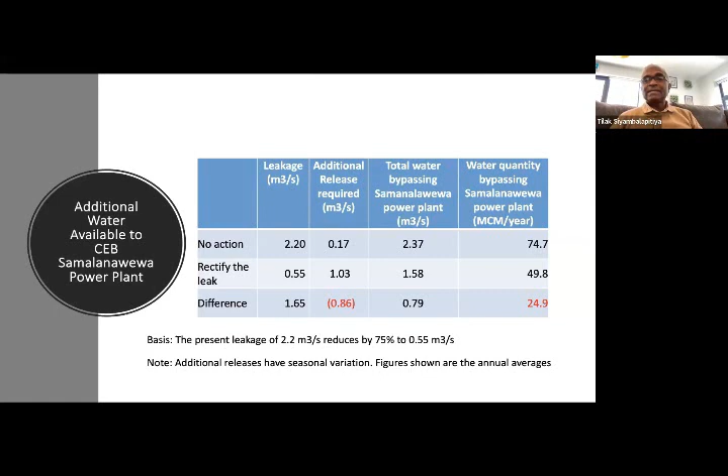So therefore, a quantity of 75 million cubic meters per year is bypassing the power plant. Of course, even after you rectify the leak, there has to be additional releases from the irrigation outlet. So therefore, still, after you rectify, there will be a total of approximately 50 million cubic meters bypassing the Samanalawewa power plant. So therefore, rectification of the leak to a level of 75% should roughly save about 25 million cubic meters per year, which will now be available to produce electricity in the Samanalawewa power plant. So these are the numbers that are the basis of my calculations.

So now, there are two mini hydropower plants that were built after Samanalawewa, and they are now using the leakage and irrigation releases to produce electricity. But then what we have to remember is that the rate of water use for electricity production is lower in Samanalawewa CEB power plant when compared to the mini hydropower plants.

Samanalawewa requires only 1.3 million cubic meters for a million units of electricity, whereas the two mini hydros require about 3.5 times that, which is about 4.3 million cubic meters per gigawatt hour of electricity production. So you would agree with me that water saved in the reservoir certainly will produce more electricity than it would have done if it was allowed to flow downstream as part of the leak or as part of the irrigation release.

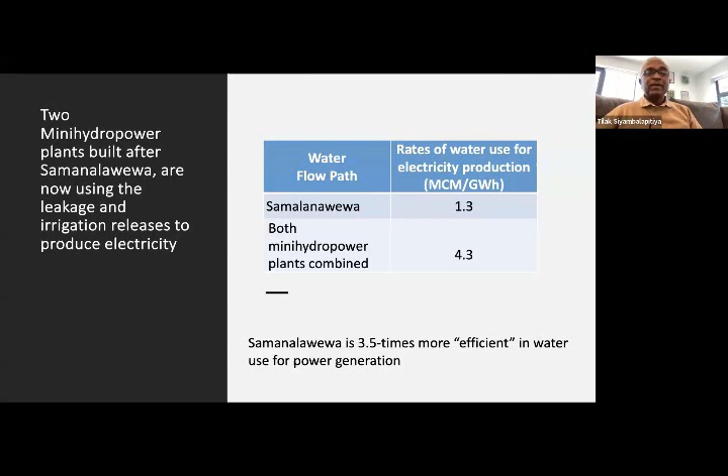So moving on, the net energy benefit of additional generation of Samanalawewa, based on the numbers I presented just now, will be 19 gigawatt hours per year. But then there will be energy lost from both the mini hydropower plants, which is 5.8. So therefore, net energy gain for Sri Lanka's power system is, in our estimate, 13.2 gigawatt hours per year, a very conservative estimate.

How much 13.2 gigawatt hours per year is worth can be calculated in different ways. If we go by the most expensive CEB power plant, which uses about half a liter of diesel per kilowatt hour, you see the answer right at the bottom: 164 million rupees every month will be the equivalent saving from this quantity of electricity. So it's slightly less than Dr. Jagat's estimate, but it is closer. But I personally would like to make an even more conservative estimate.

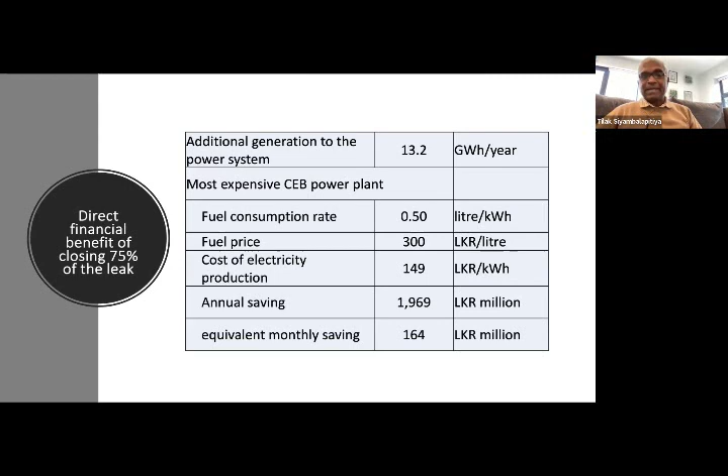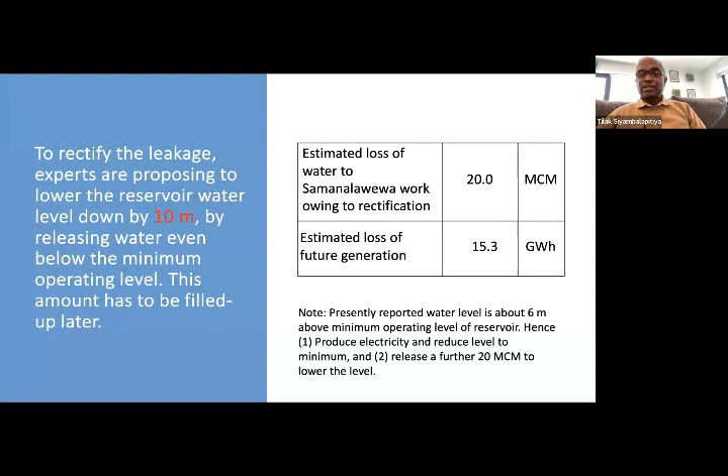Now, assuming the experts finally recommend in their strongest terms, and the government agrees to proceed with the rectification, we have been told the water level has to be dropped by a further 10 meters. The reduction in water quantity in Samanalawewa will be, in our estimate, 20 million cubic meters. This will cause a loss of 15 gigawatt hours of future generation, because you are letting water out of the bottom outlet to lower the water level to conduct the rectification work. We should not forget that as well. So the net energy benefit to the grid is a minus in year one because we lose water to lower the level. But thereafter, every year, there is 13.2 gigawatt hours saving and produced into the grid.

I would like to take a more conservative cost estimate of the value of a kilowatt hour saved. My estimate is 60 rupees a kilowatt hour based on the most efficient diesel power plant in the system. Remember, earlier I used the most inefficient diesel power plant, but I would like to be conservative, so I assume the most efficient diesel power plant, which costs about 60 rupees at the prices that prevailed two weeks ago, not yesterday. So the estimated saving will be 919 million lost in the first year, but the gain every year thereafter will be approximately 800 million rupees, estimated very conservatively every year for as many years as you like.

I've done the present value calculation at a discount rate of 10%, economic discount rate, for a period of 30 years, and I get an answer of 6 billion rupees of present value of the benefits.

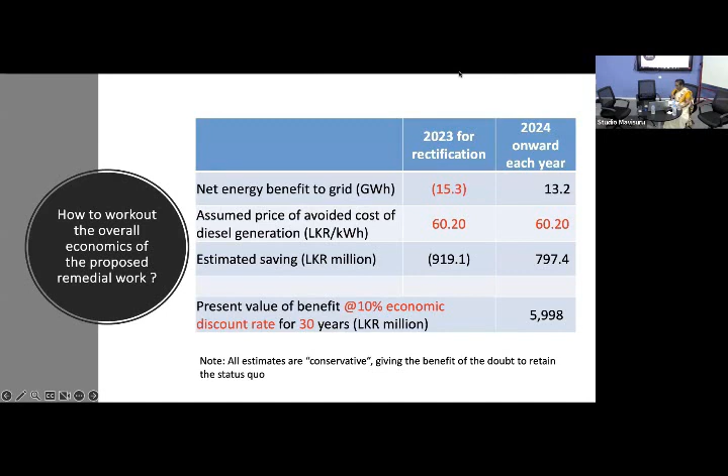Thank you very much, Dr. Siyambalapitiya. Within this short time given to you, you have done this excellent analysis. I'm sure we can improve this with more reliable figures. I'm not sure whether you have considered the power that can be generated through Udawalawa when you release the water to Udawalawa, which is now at a low level.

Can I give a quick response? My quick response is no, I have not considered the incremental electricity production in Udawalawa, as well as incremental electricity production by the two mini hydros, if and when you drop the water level by 10 meters to start the rectification work. So that additional benefit I have not considered. Once again, what I say is that my economic evaluation is the most conservative, and the benefit estimate is the lowest. So anything else you calculate will improve the economic benefits.

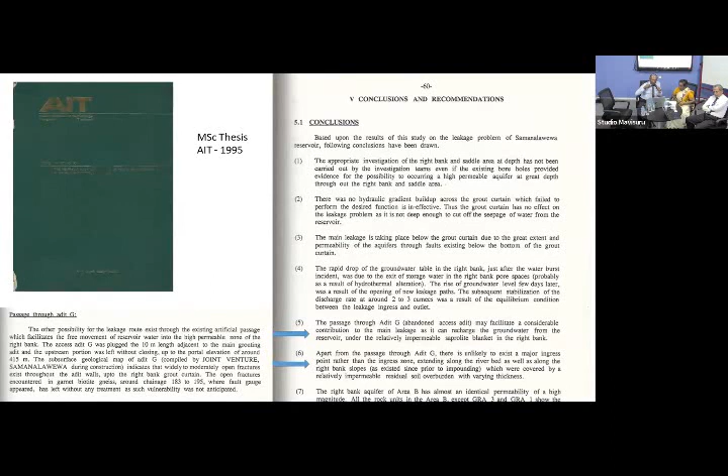Actually, in 2019, with my recommendations, the DGM at that time, Mr. Somatilaka, took me to Samanalawewa and asked me to study it, in October, November, December 2019. During that time the spillways were to be opened because the reservoir level had already come up to 455 meters, so if they could not raise the reservoir level, water had to be released through the spillway. Without releasing during those two months, November and December, as I was informed, CEB could generate power worth 2,000 million rupees, 2 billion rupees of power generated.

If we could follow that advice, I remember all the engineers came to Ratnapura CEB office, and we had to convince them that there is no problem, we can raise the reservoir level, at that time in 2019. But the condition today is a little different. If no mitigation measures are done, I doubt whether we can fill the reservoir even up to 455 meters, because the conditions have changed. So that's how it is.

Can I just, okay, I understand there's a cabinet decision, somewhere in 2021 if I recall, to lower the reservoir, do the investigations, and apply the remedial measures. Why are you waiting for it? We have got a green light from the cabinet, before they change their mind, let's do it. Number one. Number two, the time is already 8:30, why don't you conclude?

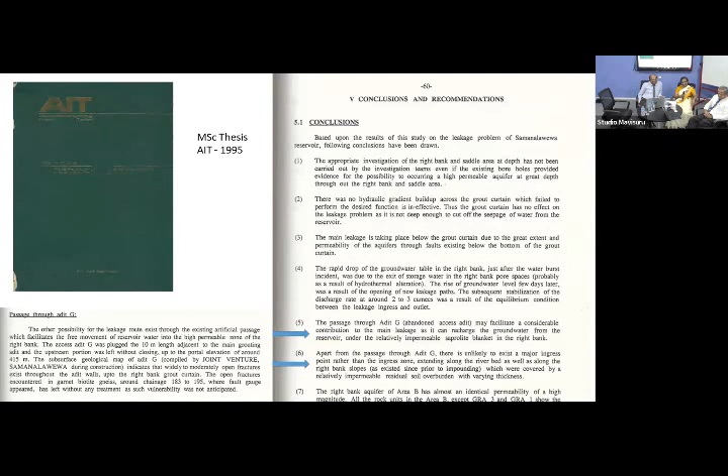Okay, well, we are going to conclude. Shall we conclude? Very much for reminding about that cabinet paper, I don't know whether it is still valid. Anyway, we will conclude the discussion here. Thank you very much, everyone.